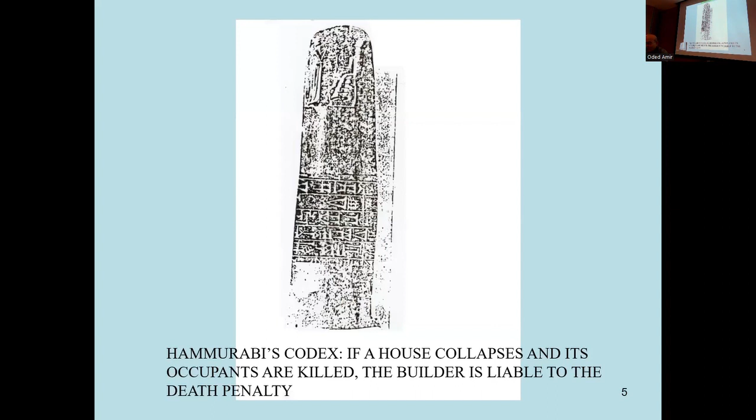That is this law. You may say this law looks very strong. However, even in 1804, Napoleon's Civil Codex says almost the same. He did not know about Hammurabi's codex, but his codex starts the same way: if a person builds a house and the house collapses, then the engineer should be imprisoned for 10 years at least, because during these 10 years they will find the cause of the collapse.

I investigated the topic of who first introduced safety factors, and found Navier, Coulomb, and others, but later I found that Bernard Belidor, in his book dated 1729, introduced the safety factor with the value my chairman used, 2.3. He uses exactly the same number, but gives no justification for the safety factor. He says we are using a 'factor of security' — that is how the French called it, 2.3 — which means probably some other people used that before, because he does not give any reference. That is this Belidor.

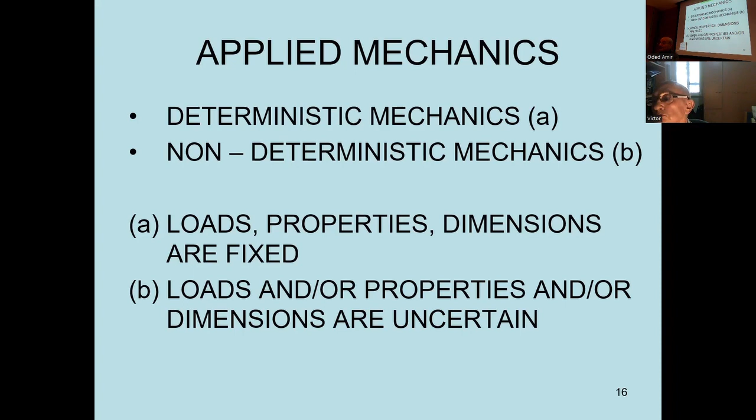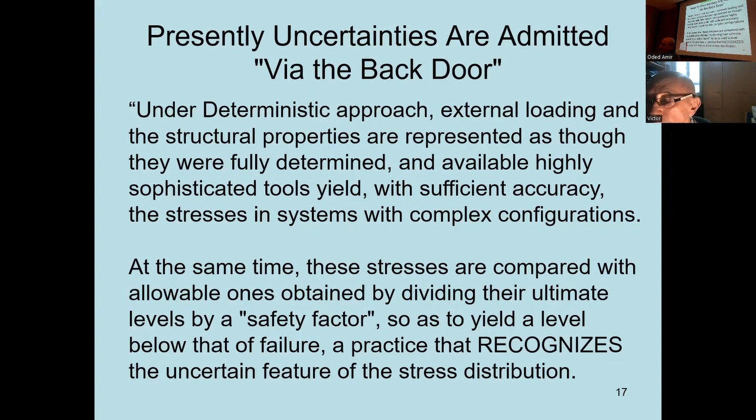Let us read how the textbooks introduce the safety factor. I did not put the authors' names, but under the deterministic approach, external loading and structural properties are represented as though they were fully determined, and available highly sophisticated tools yield with sufficient accuracy stresses in systems with complex configuration. At the same time, these stresses are compared with allowable ones obtained by dividing their ultimate levels by a safety factor, so as to yield a level below that of failure, a practice that recognizes the uncertain feature of the stress distribution. Why should there be a safety factor if we calculate stresses with extreme accuracy?

This is how probabilistic consideration is actually admitted via the backdoor. They do not introduce uncertainty explicitly; there are no signs of uncertainty there, but they just explain we need some safety factors because of uncertainty. Some people call it an ignorance factor. Freudenthal, Professor Freudenthal, who started his academic career at the Technion in the 1930s.

That is the safety factor: sigma stress should take values less than or equal to sigma allowable, which is compared with some yield stress divided by the safety factor. So the safety factor in actuality represents an introduction of uncertainty via the backdoor. In this sense, purely deterministic mechanics does not exist, because if you have to introduce safety factors justified by uncertainty, then there is no deterministic mechanics, so to say.

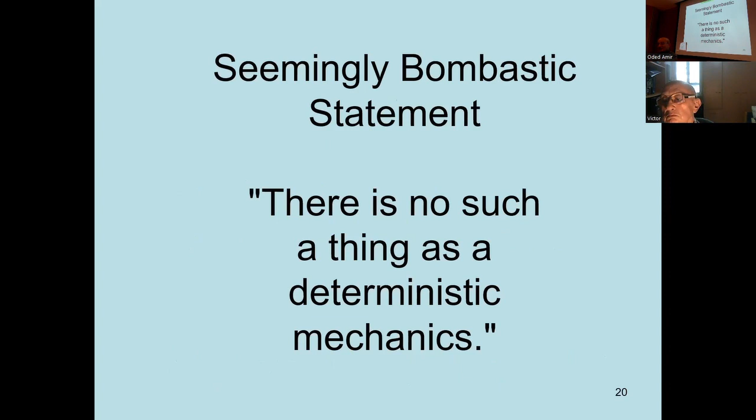So this is a seemingly bombastic statement: there is no such thing as deterministic mechanics. Uncertainties are everywhere, according to Richard Feynman. H.G. Wells said statistical thinking will one day be as necessary for efficient citizenship as the ability to read and write. Indeed, now in the newspapers, every day you are confronted with various statistical data about things.

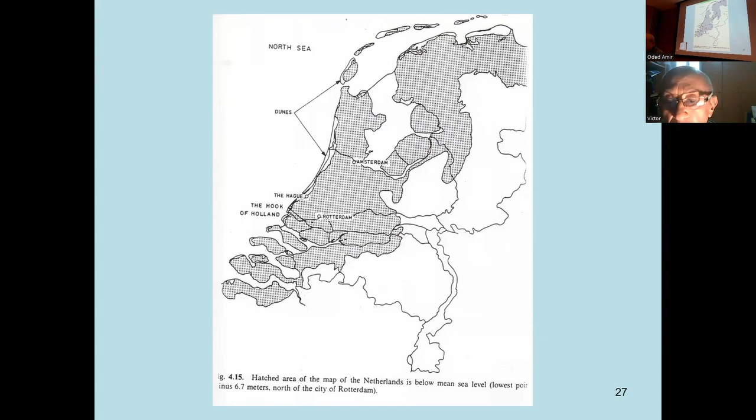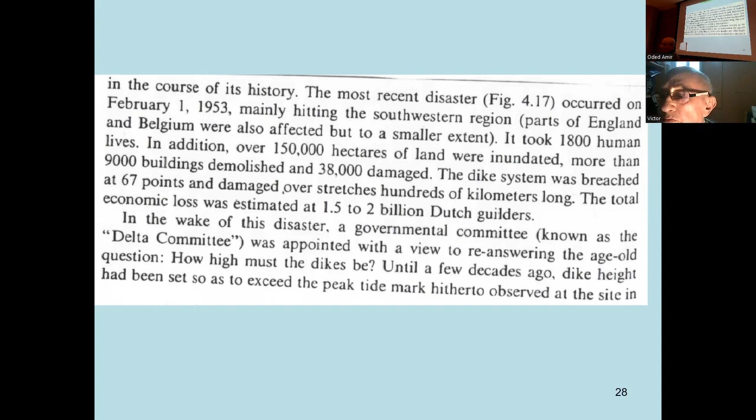Then they decided to build dikes and to have some mathematical analysis of the height of the dike. There was this rule of thumb in Netherlands: if a dike was breached, then the new dike should be made 1 meter higher than the breached dike. In development of this rule of thumb, some Nobel Prize winners participated.

Now maybe I'll go back. It turned out, okay, I do a very simple analysis conducted by Van Dantzig. Netherlands announced some scientific competition on design of dikes. Then Van Dantzig of the Statistical Institute of Amsterdam presented an analysis.

He used it as a problem of insurance. What is the problem of insurance? How much funds should be allocated this year in order to take into account damages which may occur in the future? So if it happens a year later, for example, if you put X amount of euros in the bank, next year it will accrue some percentage, so that this amount of money will grow to a certain amount, etc. They put this for 100 years.

And then what are the damages? They minimized these damages multiplied by probability of failure. How do they calculate probability of failure?

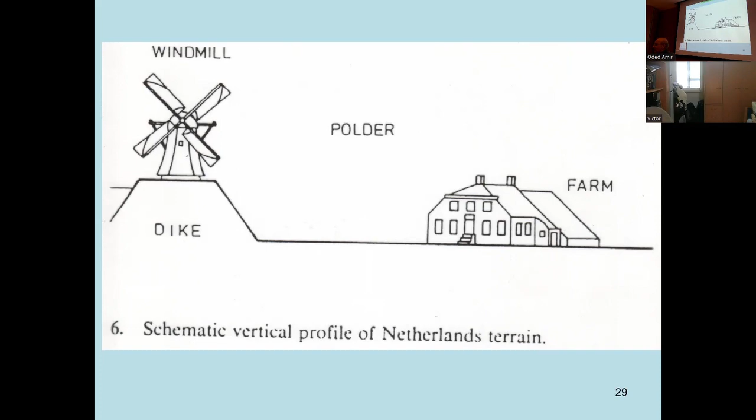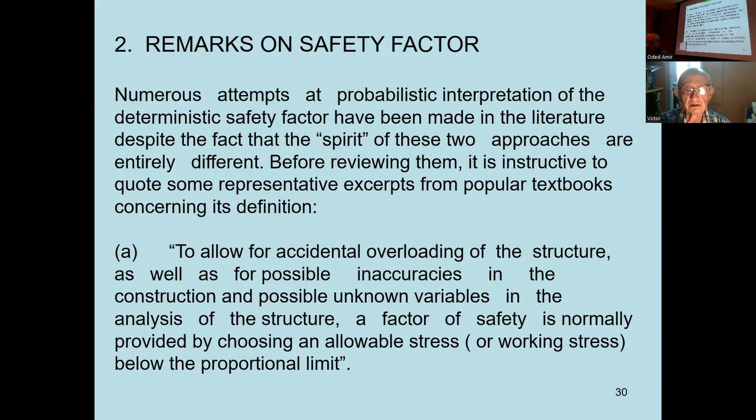Okay, these are the remarks on safety factors taken from various books. To allow for accidental overloading of the structure as well as for possible inaccuracies in the construction and possible unknown variables in the analysis of structure, a factor of safety is normally provided by choosing an allowable stress or working stress, etc.

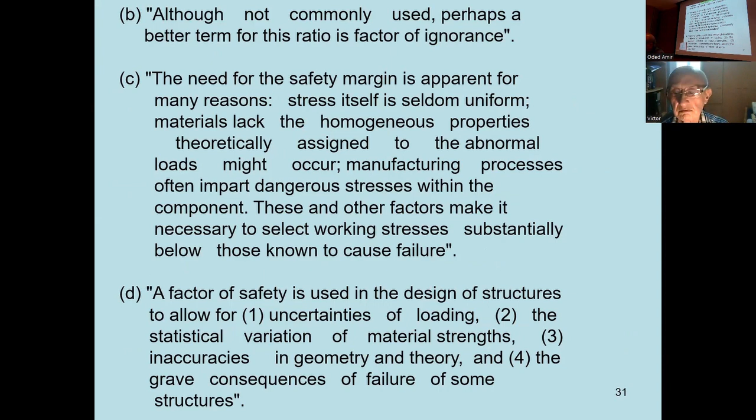This term, also not commonly used, is called the ratio factor of ignorance. The need for safety margin is apparent for many reasons: stress itself is seldom uniform, materials lack homogeneous properties, etc. So there is recognition in almost every text that uncertainty plays a role, but uncertainty is not actually introduced in the analysis. Yet uncertainties cannot be neglected.

For example, during inauguration, Queen Beatrix of the Netherlands, on April 30, 1980, said: if one thing today is certain, that is a feeling of uncertainty. That is she.

Okay, let us go to some probabilistic analysis. We will see whether probabilistic analysis provides any input to this topic.

Consider a situation when the state of a structure in use can be described by some finite number of generally probabilistically dependent parameters x1, x2, etc., xn, part of which characterize the loading, and another part characterizes the strength of the materials involved. For some combination of these parameters, the system is acceptable for use, in which case it is said to be in a safe state.

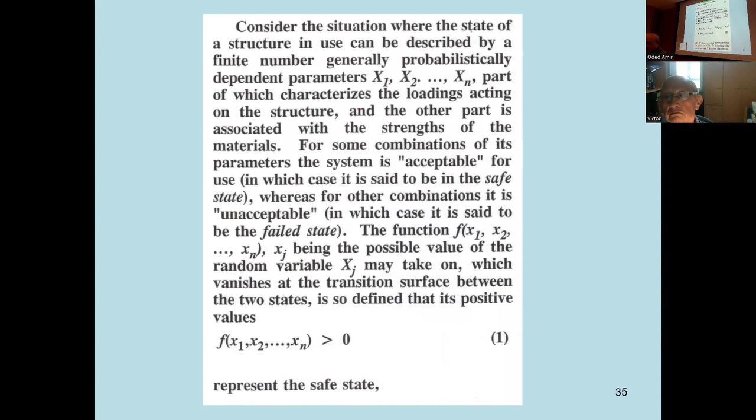We define it: the F function should be positive. If F is positive, we write the limit condition such that F is positive, then a safe state is achieved. And if it's negative, then it is a failed state.

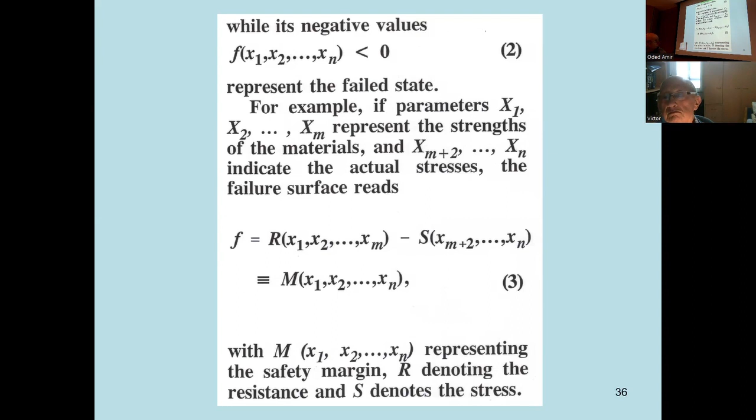For example, take this function R minus S, where R characterizes the strength of the material, depending on x1 to x sub m. Stress is characterized by x sub m plus 1, until xn. This difference we call the margin, and that is the safety margin.

Then, reliability of the structure. What is the reliability of the structure? Reliability in this particular case will be defined as stress levels not reaching the strength levels—strength is higher than stress. That means the margin should be positive.

Therefore, reliability would be, if I know the probability density function F sub m of small m. Now, what is small m? Small m is a possible value of the safety margin, so it's a deterministic quantity. Capital M is the safety margin—it's a random variable. F is the probability density function of this safety margin. So the safety margin should be integrated from 0 to infinity.

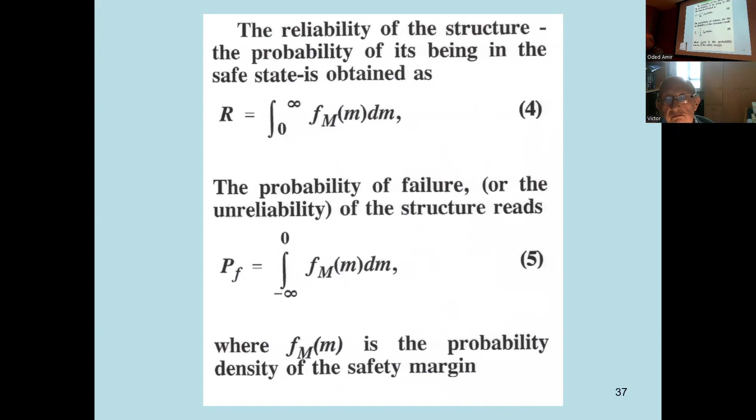The probability of failure, or unreliability of the system, P of F, will be the integral of the same integrand from minus infinity to 0, where Fm of m is the probability density function of the safety margin. This could also be put as formula 6, which we could calculate.

That means the integral from minus infinity to plus infinity of the probability density of strength, where R is strength, and Fs is the probability density of stress. Irrespective of the specific densities of R and S, we can also calculate some characteristics of the random variables—that is, the mean of the margin.

Mean E is mathematical expectation. Mathematical expectation of strength minus mathematical expectation of stress.

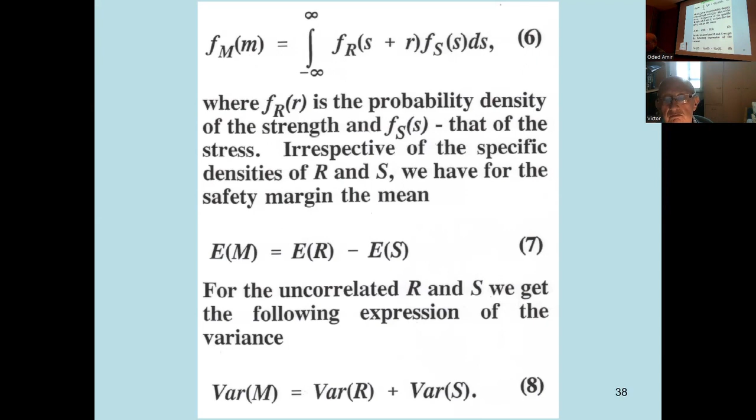Below, formula 8 is the variance of the safety margin. Variance of the safety margin equals the sum of the variances of R and S, respectively.

Then we can also define a reliability index beta, which involves the mean value. Because mean value has a dimension and we would like a non-dimensional parameter, we introduce mean divided by sigma m, the mean square deviation of the safety margin.

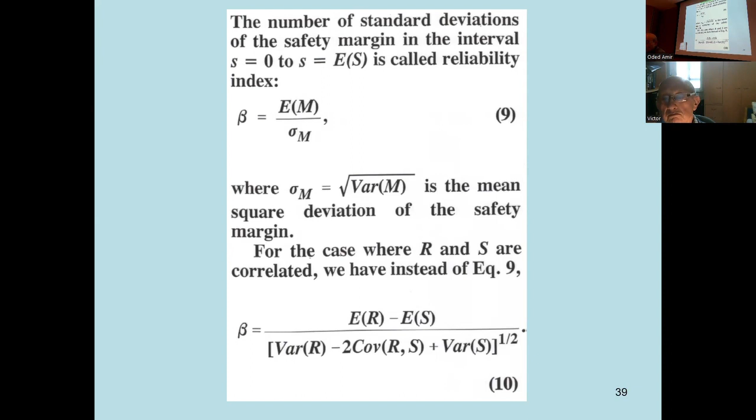This beta turns out to be formula number 10: in the numerator we have the mathematical expectation of the safety margin, and below, the mean square deviation of the safety margin. Now, for example, in the denominator we also have a second term, the covariance of R and S, since strength and stress may be correlating with each other.

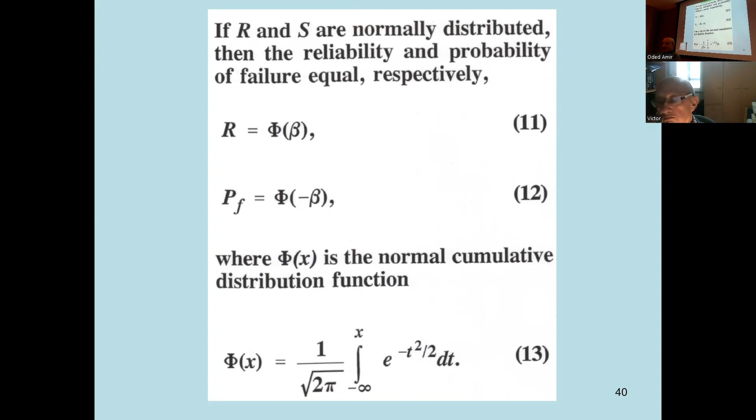So it turns out that reliability is given by the normal cumulative distribution function of Gauss, defined here in formula 13, calculated at beta. Beta is the safety index. So reliability is phi function at beta, and probability of failure equals phi at minus beta.

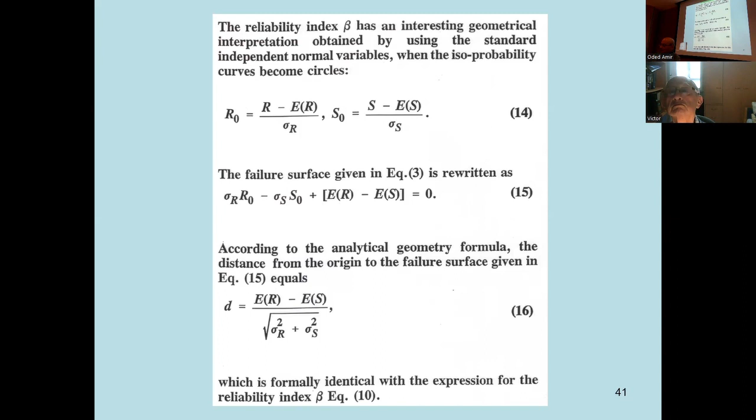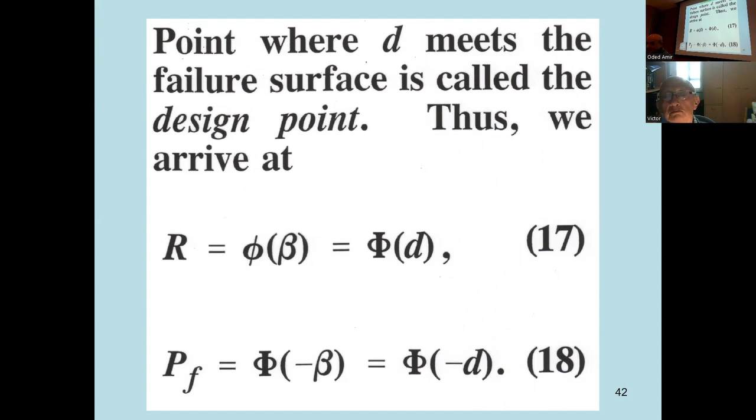The point where D meets the failure surface is called the design point. So we can say that reliability is actually phi of this beta, or phi of some distance from the origin of the coordinate system to the failure surface. This can be easily shown.

Now let us calculate some examples. Imagine the strength and stress are independent and their marginal densities are exponential, that is formula 19. Imagine we conducted measurements and found this, meaning the probability density of strength is distributed exponentially, depending only on one parameter, E of R, the mean strength.

The probability density is 1 divided by mean strength, times exponent of minus the possible value small r divided by mean value. For stress, it's 1 divided by mean value of stress, times exponent of minus stress value divided by mean stress. Reliability, after calculation, turns out to be mean strength divided by mean strength plus mean stress. That is the final reliability.

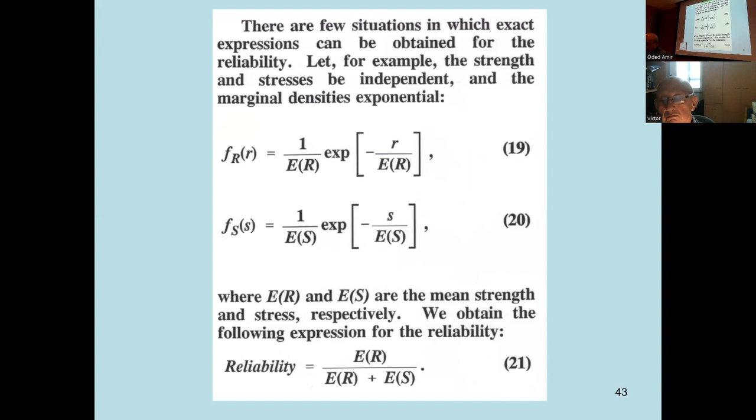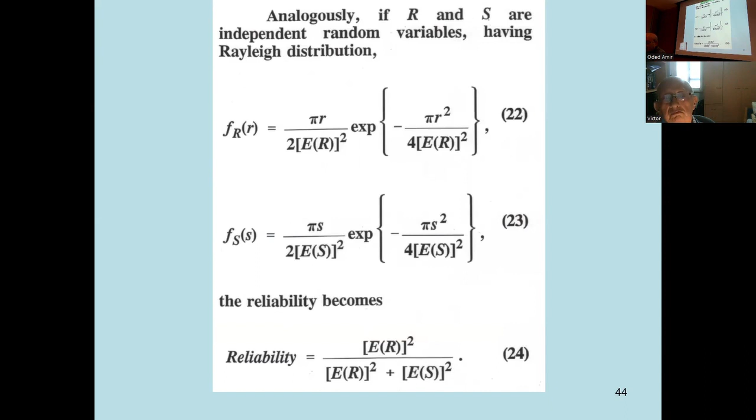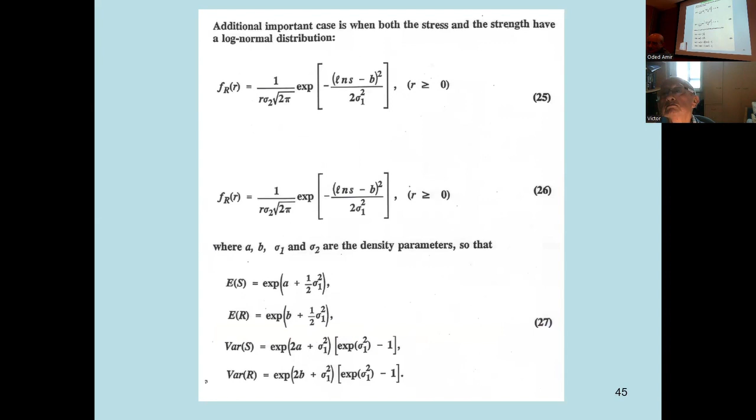Another calculation: if strength and stress have a Rayleigh distribution—that is, exponential but with the argument squared—then we obtain a formula where reliability equals mean strength squared divided by mean strength squared plus mean stress squared. For example, in the case of a log-normal distribution, we can also calculate results in final form.

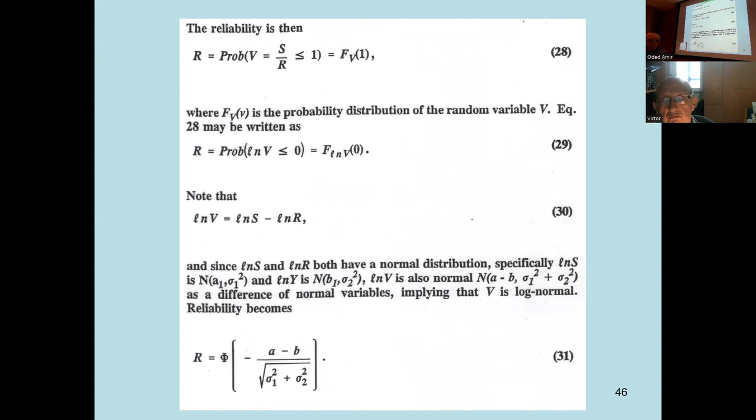In the case of log normal distribution for both S divided by R, we can introduce a new variable V. We would like this variable to take values less than or equal to 1. That will be the reliability function.

Now we can introduce this, as was done by some people. Probably the first person to do this probabilistic analysis was Professor Freudenthal. He came to Israel in the 30s and started to work at the Technion. There was an interesting correlation that occurred between us, in the sense that when I started working in the mechanics department at the Technion, suddenly a person came to my office and asked whether I wanted tea or coffee delivered at 10 a.m.

I was very surprised at such a capitalistic treatment, delivery of tea at 10. He asked me what I was doing scientifically, and I decided to explain very easily. I got a coin and threw it, and said, look, this coin can fall on head or tail, with probability of 0.5, but we can imagine that an airplane in turbulent atmosphere is subjected to such randomness. This person told me that's very interesting, but we have a faculty member doing stochastic control, and it would be nice for you to get together with him. I was surprised, and asked myself, can you succeed at the Technion where even the person who distributes tea is so knowledgeable in stochastic mechanics? I told this story to Mrs. Freudenthal many years later at a conference, and she said yes, she agrees that the mean level in Israel is exponentially high - that's what she told me, or average level.

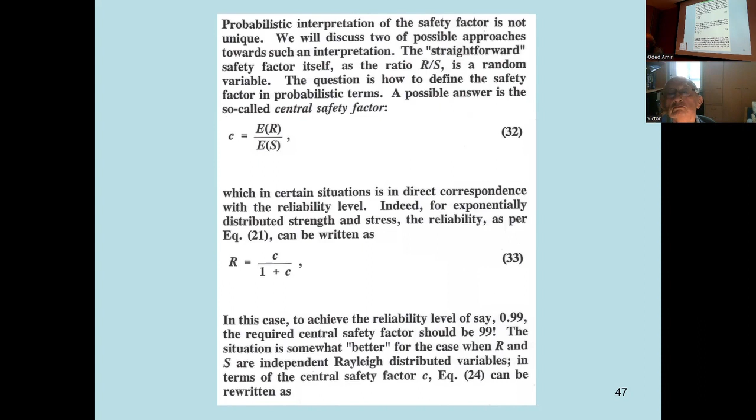Analogous high values happen also for Rayleigh distribution. But in some cases, safety factors are indeed demanded to be very high. For example, in elevator design, safety factors are about 8 to 10. So you do the analysis for the dimensions, and then multiply the resulting dimension by a factor of 10, because on one hand there is responsibility, and on the other hand you don't want this failure to occur.

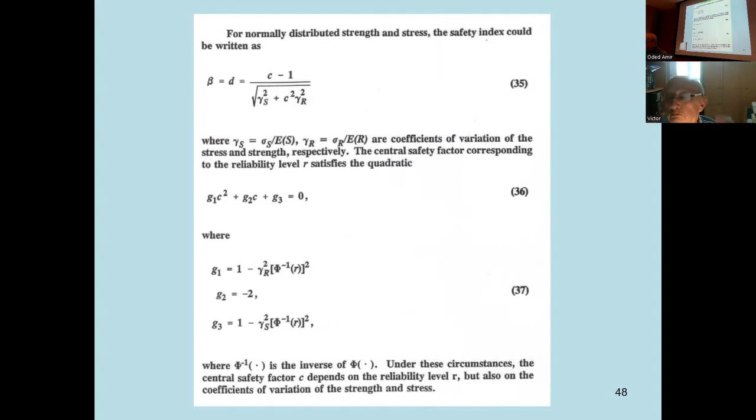For example, if that is a log normal distribution, the safety factor can also be analytically calculated. Pay attention - we see that this safety factor can be justified probabilistically. That means that the people who introduced the safety factor, Belidor, achieved something unbelievable. They did not know it could be justified probabilistically, but they introduced it.

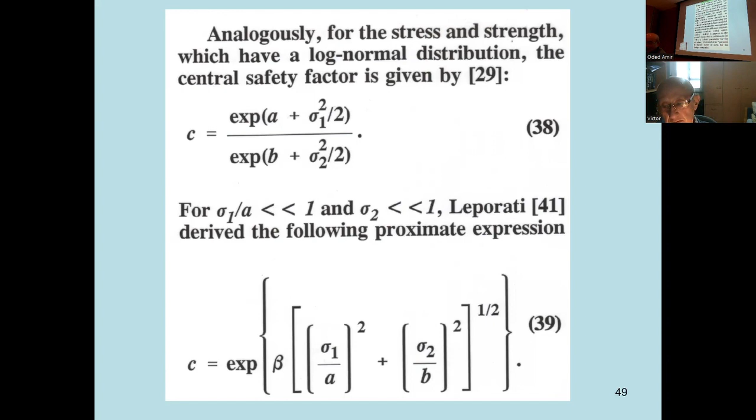Leporati gives some approximate expression for this safety factor. Freudenthal himself remarks - by the way, his first paper on this topic was published in 1937 in Hebrew, in a publication called Journal of Jewish Engineers.

He says: it seems absurd to strive for more and more refinement of methods of stress analysis if, in order to determine the dimensions of structural elements, the results are subsequently compared with so-called working stress, derived in a rather crude manner by dividing the values of somewhat dubious material parameters obtained in conventional material tests by still more dubious empirical numbers called safety factors.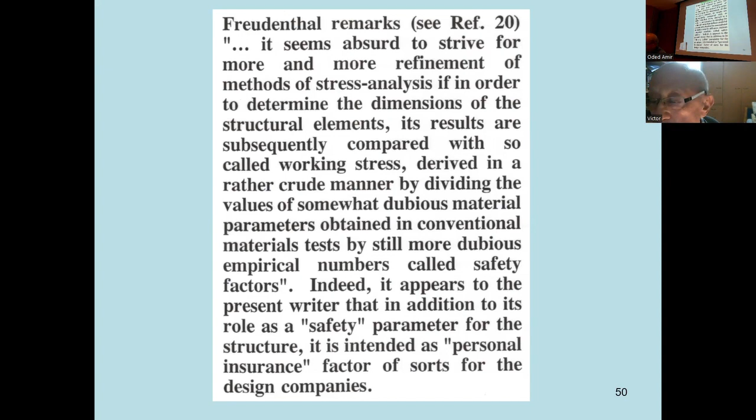Another explanation - pay attention. Freudenthal defined safety factor as the mean value of strength divided by the mean value of stress, so that is a ratio. However, we could introduce something else: the mean value of the ratio R divided by S.

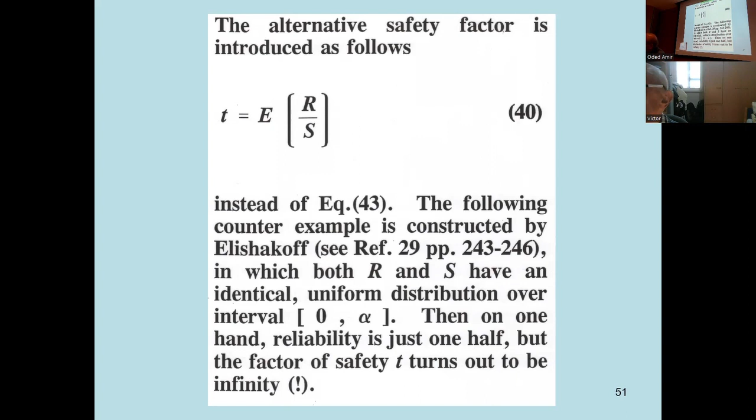We can construct an example where R and S have uniform distribution over some interval 0 to alpha, and the reliability turns out to be one half while the factor of safety goes to infinity. That is what I meant - we would like an honest explanation. Probability does not solve all problems; we get some paradoxical results too.

So this probabilistic explanation would be: we need sigma to be smaller than or equal to sigma y, and the safety factor comes in here. We would like this to be far away from yield stress, and that's why we introduce this safety factor.

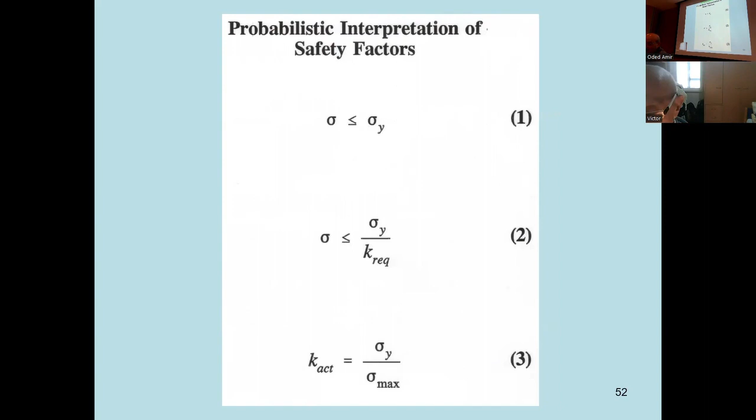We can construct a simple example of calculating these safety factors. For instance, we have an element subjected to some uniform stress sigma, and this stress sigma has a Weibull type distribution. Or we can also introduce a case where the probability density is uniformly distributed - meaning the probability density is constant between a lower value of stress and an upper value of stress.

So probability density is a linear function: sigma minus sigma L divided by sigma U minus sigma L. Probability distribution of sigma, the random stress. Everything random we denote by capital letter, everything deterministic, the possible value, we denote by small letter. So that is the probability that capital sigma is not greater than small sigma. We get this formula for the probability distribution function: sigma minus sigma lower divided by sigma upper minus sigma lower.

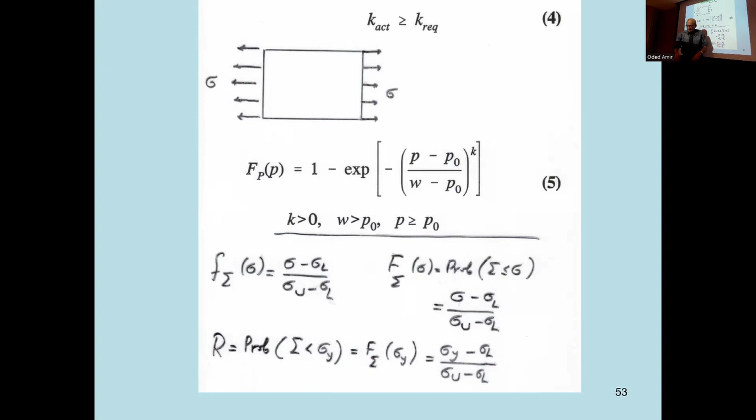And just here we put sigma y minus sigma L over sigma U minus sigma L. Okay, pay attention: sigma lower can be calculated as average minus square root of 3 times mean square deviation of stress. Sigma upper is the symmetric expression: mean stress plus square root of 3 mean square deviation.

And then reliability, look, this was what we obtained in the previous formula: sigma y minus sigma L divided by sigma upper minus sigma L. This could be recast as this formula: sigma y minus mean stress plus square root of 3 mean square deviation, and here will be 2 times square root of 3 mean square deviation.

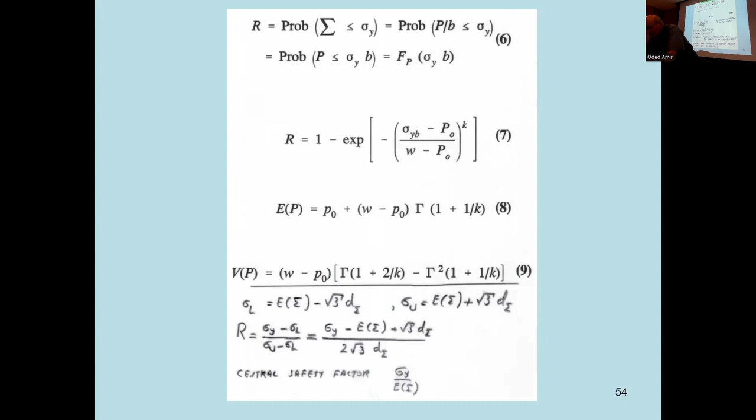Now we can introduce the central safety factor, that is sigma y divided by E of sigma. So we divide everything by E of sigma, and instead of this term we obtain the safety factor, or central safety factor. And we obtain this one.

Look, reliability equals safety factor minus 1, plus square root of 3 times coefficient of variation of the stress, divided by 2 times square root of 3 coefficient of variation of the stress. And actually we can find the safety factor.

Safety factor is 1 plus something, pay attention, it's a nice formula. You remember my chairman told me it will be 1.7 or 2.3, etc. So: 1 plus 2 times square root of 3, times reliability R, times coefficient of variation, minus half, and that is multiplied by coefficient of variation. So the good thing is that it's 1 plus something.

Indeed, Einstein has this quote: it is incomprehensible that nature is comprehensible. I think we are also seeing here that suddenly safety factor can be introduced through reliability, so to say, of the system. So what one should deal with is reliability of the system rather than safety factors. And indeed, I repeat, the person who introduced the safety factor concept was a genius.

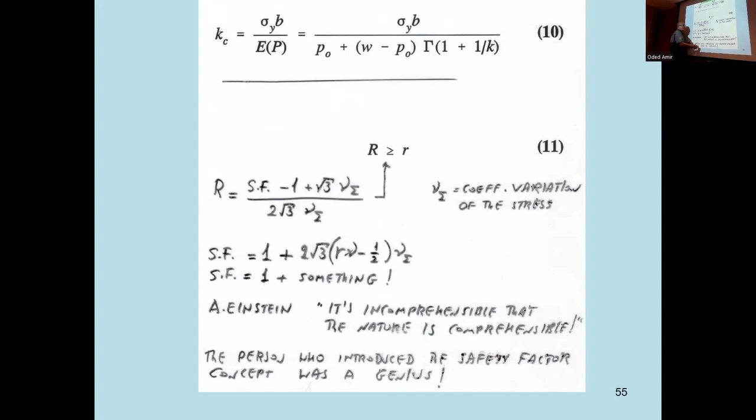Okay, for example, in the other case of Weibull distribution, if required reliability is 0.9, safety factor turns out to be 1.231. For reliability 0.99, safety factor is about 1.4. For reliability 0.999, it's 1.5, etc. So we are getting numbers we are accustomed with.

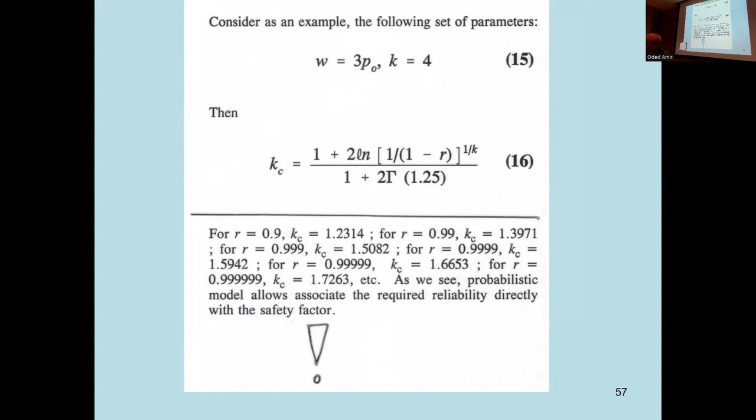So the conclusion is actually twofold. If you are an extremist probabilistic, then you say: give up deterministic design, deal please with reliability. If you are a more mild probabilistic, you would say that reliability and safety factors can coexist together. That is, for example, the philosophy taken in Eurocode in Europe. They have both safety factors and reliabilities of the system.

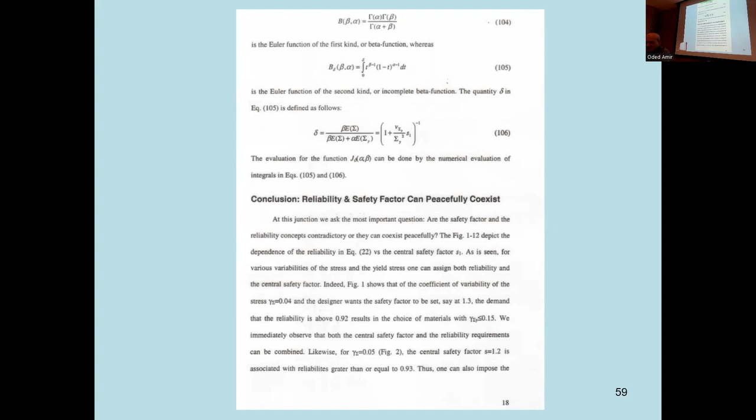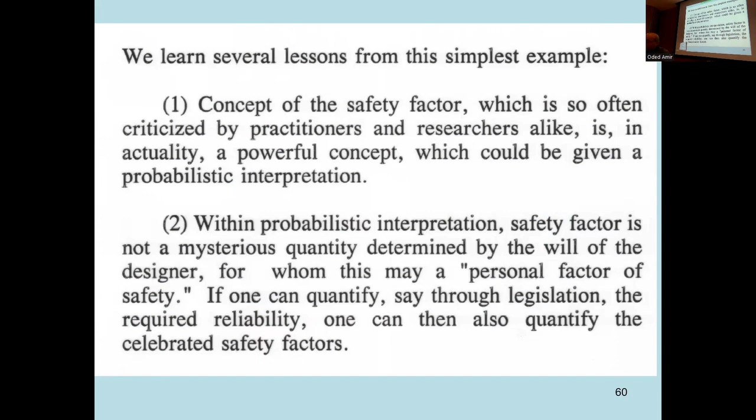So the concept of safety factor, which is often criticized by practitioners and researchers alike, is in actuality a powerful concept which could be given a probabilistic interpretation. Within the probabilistic interpretation, safety factor is not a mysterious quantity determined by the will of the designer, for which that is a personal factor of safety. One can quantify, say through legislation, the required reliability. And once required reliability is quantified, then one can derive the associated safety factors.

Okay, this is a book. It is called Safety Factors and Reliability, Friends or Foes.

So we may think that we already are using uncertainty analysis via safety factors. The question is whether it can be done better. The suggested philosophy is enhancement of the existing safety factor approach.

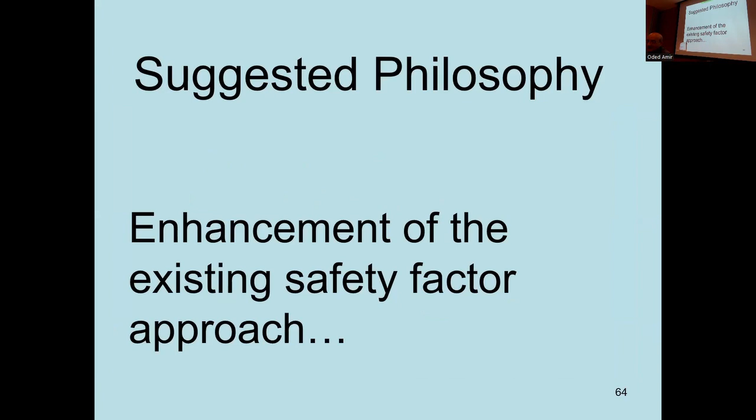For example, there is a system subject to buckling failure and stress failure. The question is, can we combine this in one analysis if it is possible? Currently, failure mode 1 is associated with some safety factor. In problems or articles, we see safety factor against stress overload is this, safety factor against buckling is this. The question is, are they commensurate or not? Can we do some realignment by using reliability analysis?

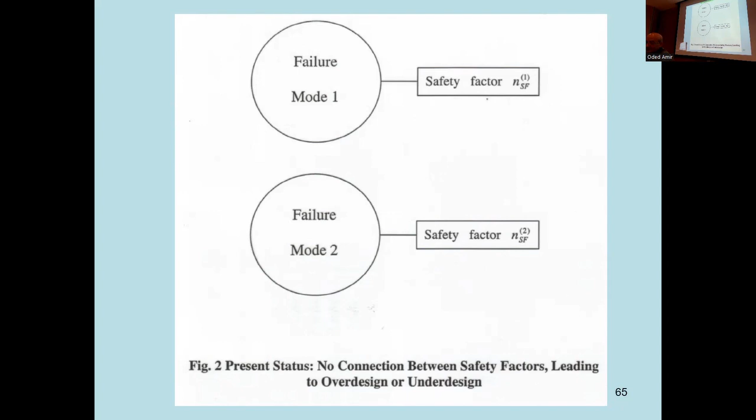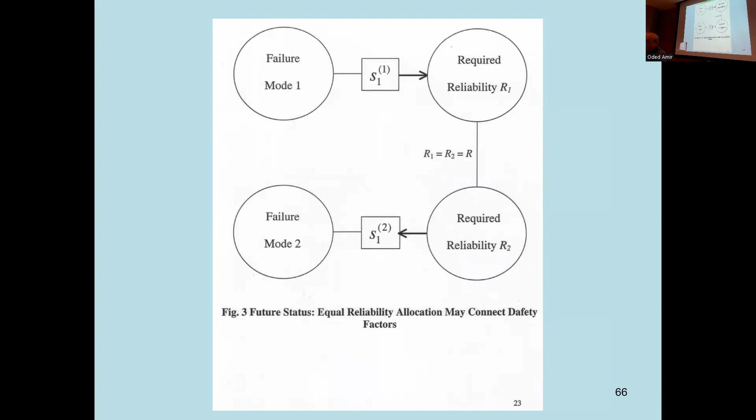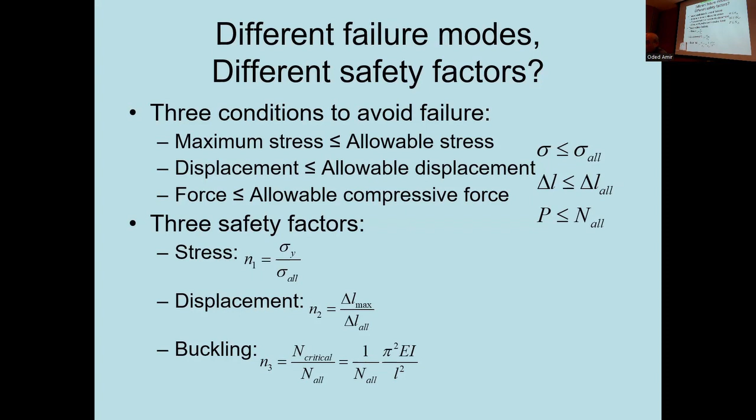At this moment, these analyses are conducted separately. But we can combine them - if there is a certain safety factor in one type of failure, we would like to obtain the associated reliability R1, and through the same reliability, we can realign the safety factors. We did a paper like this with my extremely able student Wim Verhaeghe from Belgium, who most unfortunately later died in a traffic accident in Belgium. So if there are different failure modes, at this moment we have different safety factors, but they can be combined in one analysis through reliability.

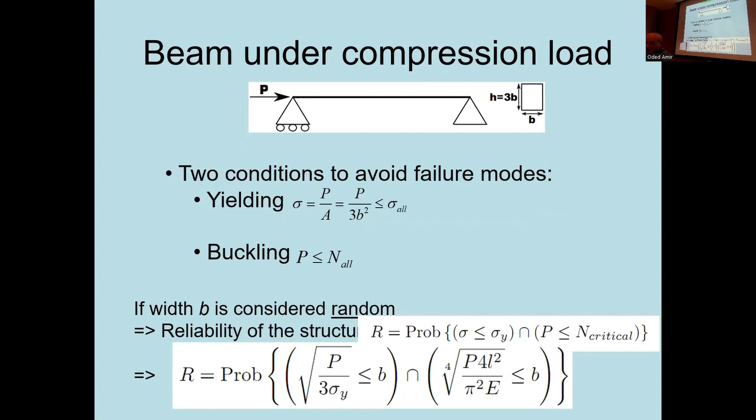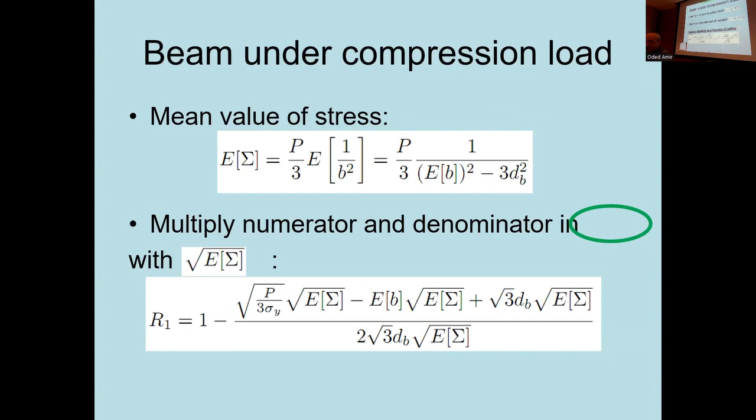Here is an example. Reliability is a lower formula - reliability is the probability that some expression is smaller than B. At the same time for buckling failure, this same expression is also smaller than B. We can calculate the associated reliabilities, and from these reliabilities, connect the safety factor in one mode with the safety factor in another mode. That works beautifully.

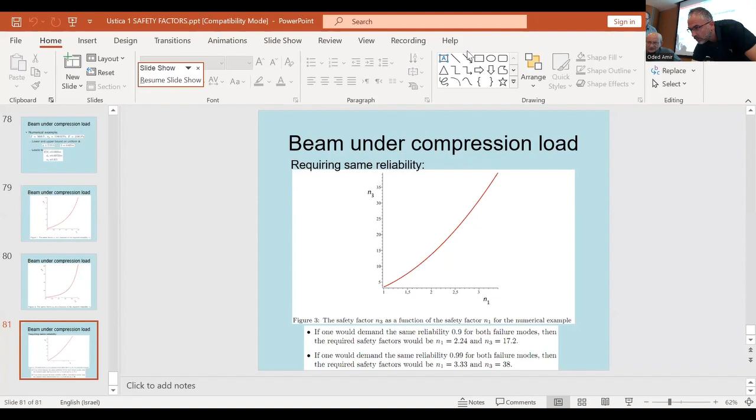On the other hand, there is something very interesting - there are many people, especially in the United States, who deal only with probabilistic analysis. They never deal with deterministic analysis, only probabilistic analysis. I feel that overestimation of uncertainty is harmful. Why is it harmful? Because suddenly the deterministic mechanism disappears from the system. They take some formulas from other papers and they fetishize them, so to say, treating them as law. And they deal with this as law.

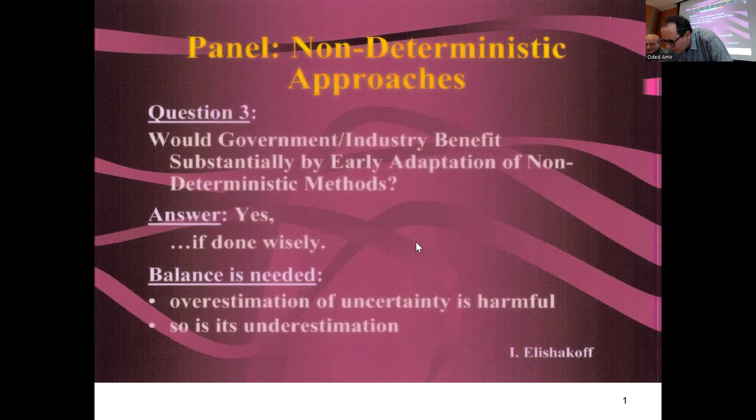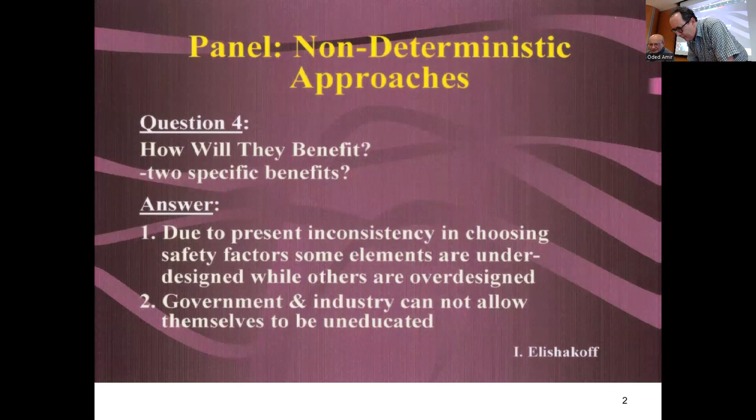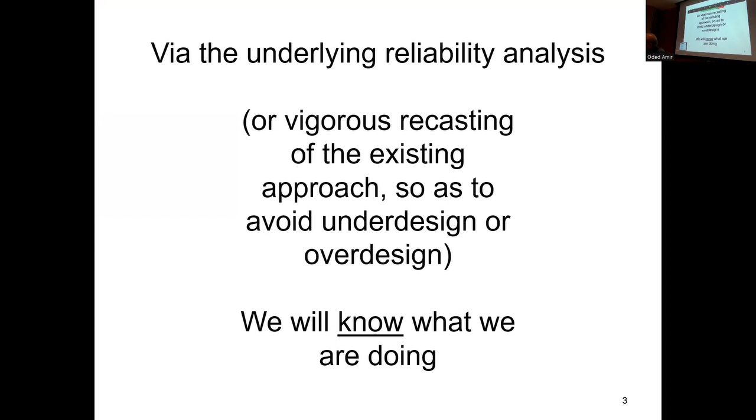So what this probabilistic analysis actually deals with, we could avoid by having one criterion, a reliability criterion, to avoid under-design or over-design. Because in buckling, for example, we showed that a structure was extremely over-designed from buckling consideration when they assigned a safety factor in buckling in some problems. So we would like to avoid that.

I will bring you an example of analysis where this is illustrated. Bernoulli and Euler in approximately 1730 developed their famous beam theory. Later, Rayleigh - but even before Rayleigh, a Frenchman, Bresse, introduced the effect of rotary inertia. For example, with a concentrated mass, it is easy to see that when the beam is displacing, this mass is also rotating. So there is this rotary inertia, but it is also in every element of the beam.

Bresse, in 1859, introduced this effect, and Rayleigh did so 19 years later. There is one more term - a fourth order mixed derivative with respect to x twice and with respect to t twice. That is Rayleigh's model of the beam, called the Rayleigh beam. Then Timoshenko, later in 1921, but actually first - as my investigations showed - he and Ehrenfest did it together around 1912, introduced two additional terms: a fourth order time derivative and an additional mixed derivative in time. They took into account the effect of shear deformation.

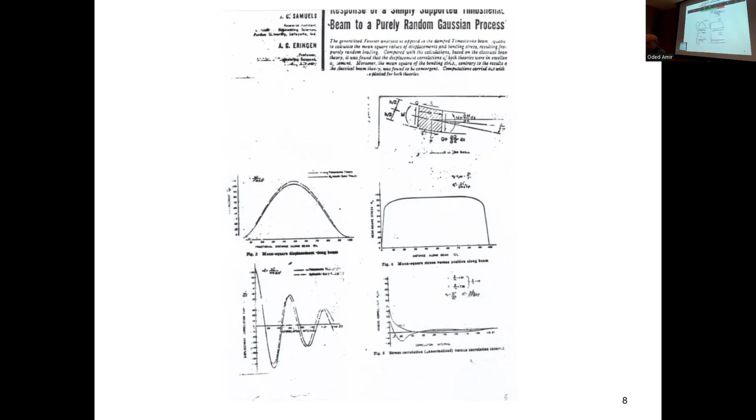Now it is interesting to investigate how these two effects influence reliability. This was done by Eringen in a famous paper in the Journal of Applied Mechanics. They showed that the curve below is according to Bernoulli-Euler theory, and the upper curve is according to Timoshenko-Ehrenfest beam theory. After that, no one touched this topic. Why did they not touch it? Because the difference was less than 5%. So if the difference between two theories is less than 5%, people thought they did not want to invest time on such problems. Then can we eliminate this line?

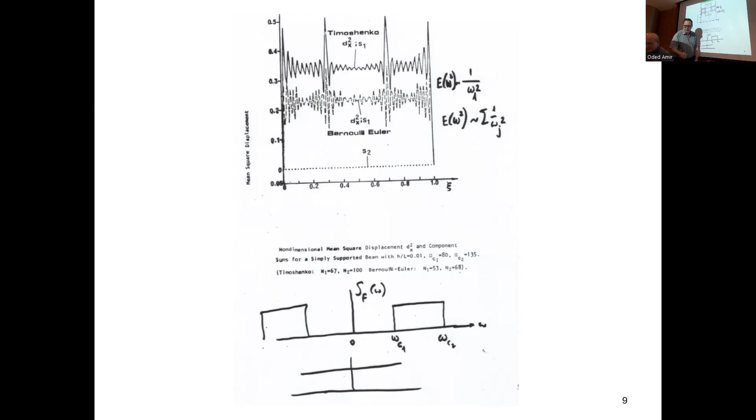Can we move this? Yeah, the end is near, but it's not yet here.

Then there was this publication of my paper, which you cannot read the title of. It says 'Possible Limitations of Probabilistic Methods in Engineering.' Pay attention, it's also a criticism of sorts. Writing this paper took 12 years. Usually, if you want a fast promotion, you don't write such papers.

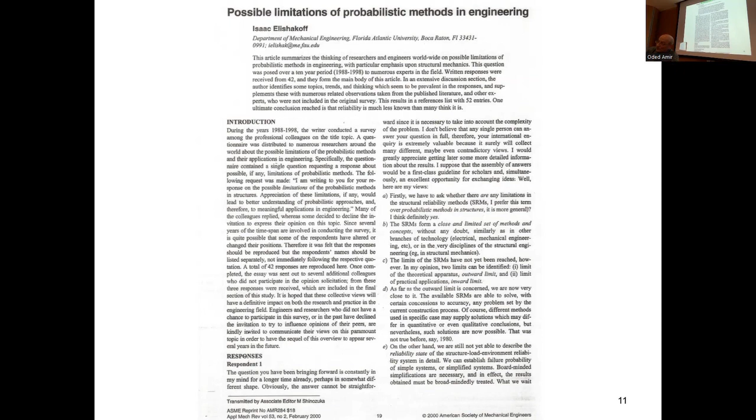In probabilistic analysis, some assumptions are made. For example, there's the work of Amazigo and Budiansky, and a series of papers on this. They assume a nonlinear beam on a nonlinear elastic foundation, with initial imperfections, the beam being infinite and subjected to an axial load. Such a system mimics the behavior of a cylindrical shell. They assumed these initial imperfections form an ergodic field, and obtained a very interesting conclusion that stunned me: they said that with random imperfections, there are an infinite number of beams, but all beams buckle at the same buckling load.

I was very surprised by this result, because if it is a random system, like throwing a coin, every time there will be a different result—not the same result. Naturally, people, especially in this country, are not ergodic—you cannot ask what 'ergodic' means. Instead of considering an ensemble, you just consider one system and calculate the probabilistic analysis for that one system. You cannot ask, for example, one Israeli only about his political views and conclude about the entire country. I hope you agree that would not be a very sensible idea, and the same goes for other countries.

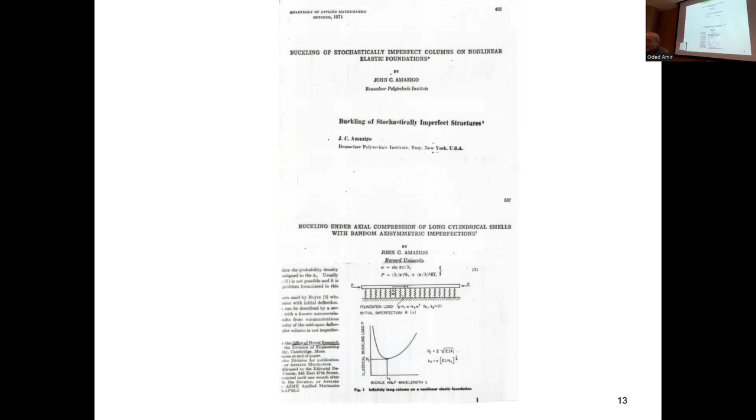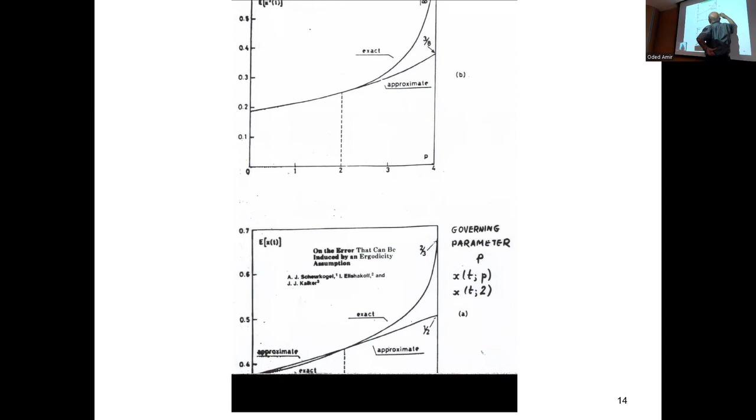But then we had mean square value. Mean square value also behaves like this. Between 0 to 2 of these P, they are almost coinciding. Then they are diverging. Approximate solution gives 3/8, exact solution gives infinity. That is very big. So ergodicity assumption, or various stochastic assumptions, can have a devastating effect on your results.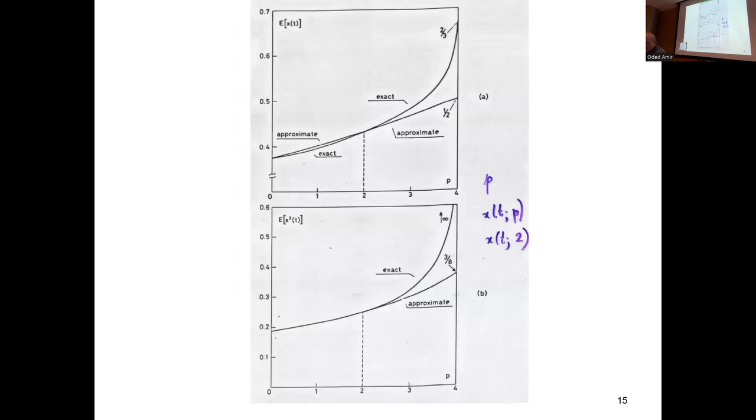Ergodicity means de facto that this frog behavior is approximately Markovian. What does that mean? That where, in which lilies, this frog will be is determined only by where it is now, not by the previous history. That is what some people maintain.

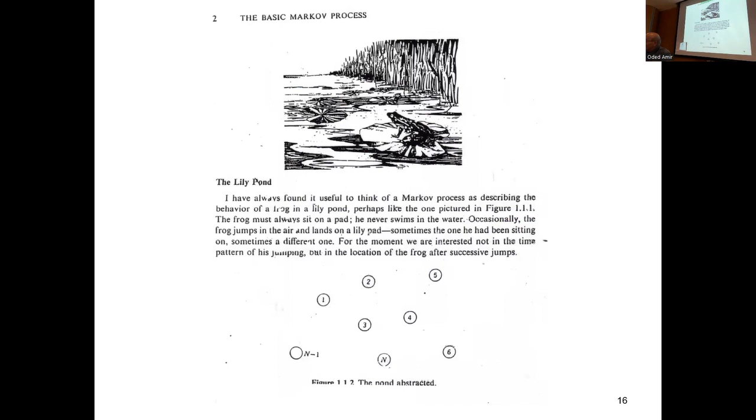Now there is another problem with probabilistic analysis. Look, Archimedes actually had said this: give me a firm spot on which to stand and I will move the earth. That is, he meant that lever. He will put the lever there and he will be able to move the earth. That is his true statement.

Analogously, probabilistic analysis says, give me the probability density and I will calculate the reliability. There is total disregard of experiments. From this point of view, experiments are super important. You cannot just postulate and then proceed with your analysis.

For example, there is criticism of probabilistic methods. Franz Kafka says, randomness exists only in our head, in our limited perception. I don't think he meant probabilistic analysis of structures, but that is what he said. Israeli philosopher Yeshayahu Leibovitz said, nature did not take the course of probability.

So this gave rise to other considerations, not only probabilistic considerations of uncertainty. We maintain that there is something like an uncertainty triangle. One is theory of probability and random processes, that is the top one. Then there is fuzzy sets, so some people came up with fuzzy sets. And other people maintained for some time that we better consider things that are uncertain but bounded. That means we should know the bounds of variation and come up with bounds of variation of the system. This type of idea started to develop in the beginning of the 20th century by Bertrand Russell and others.

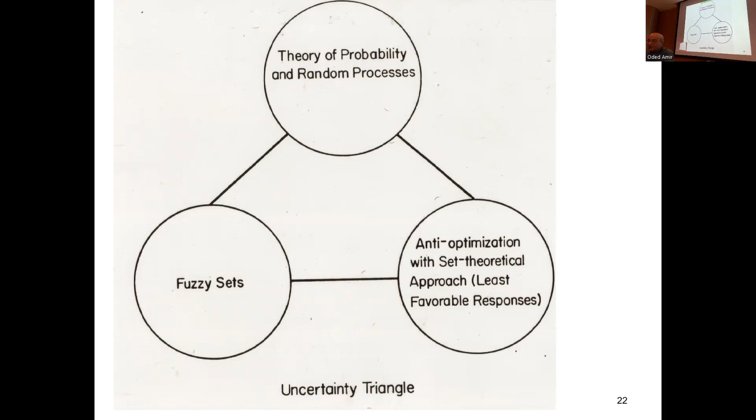Fuzzy sets, first paper was published in 1937. Second paper, which used the term fuzzy sets, 1965 by Zadeh. The last approach was advanced in a book by Professor Ben Haim of mechanical engineering here and myself, convex models of uncertainty, that is bounded sets.

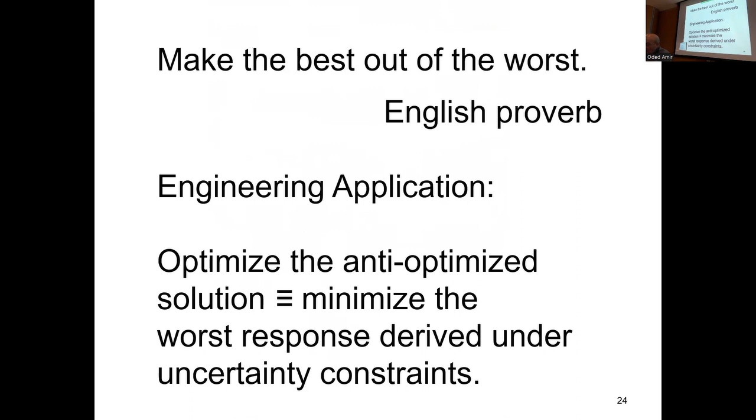Here we were looking at that time for worst case analysis of the system. Later, I thought that worst type of analysis is very good, but maybe very conservative. So this English proverb says, make best out of the worst. In engineering application, optimize the anti-optimized solution, or minimize the worst response derived under uncertainty constraints. In that book, we dealt only with worst type of response. Later, I added optimization of that response.

Fuzzy sets are also criticized. Kalman, for example, Rudolf Kalman, I corresponded with him on numerous occasions, says: fuzzification is a kind of scientific permissiveness. It tends to result in socially appealing slogans unaccompanied by the discipline of hard scientific work and patient observation. It's a very, very strong statement.

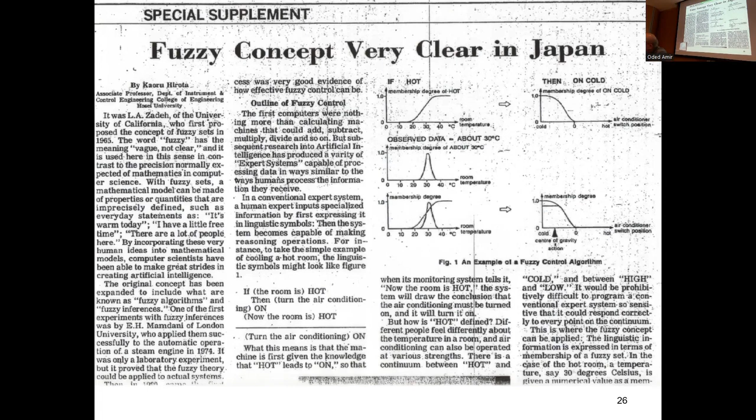But in some other places, maybe because of different cultures, I arrived in Tokyo one day and saw in the local newspaper 'fuzzy concept very clear in Japan.' Actually it's a bit more oxymoronic, because if it is fuzzy, then it should not be clear, should it? It should have some resemblance of fuzziness, but they are using this fuzziness a lot.

One can also say someone says probability does not exist. For example, Bruno de Finetti said probability is a mental construct. Analogously, fuzziness is a mental construct.

What is anti-optimization? Anti-optimization is, instead of looking for best solutions, we are looking for worst solutions and then minimizing that worst solution.

The question is, which one is right? Which analysis is right? I did not give examples of calculation here. Look, this is a fable that probably everyone has heard.

Then his wife asked the judge, how come you are telling everyone you are right? That is not possible. And he said to her, you are also right.